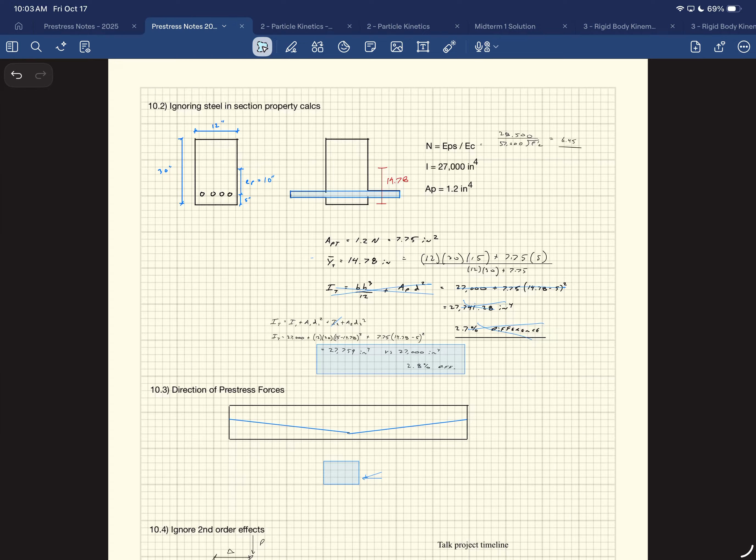Off this week, which is nice. Yeah, that's why I got the donuts. You had time, okay.

Just have a couple, there's a couple little topics left. We're gonna finish this topic. You have one more homework for this.

Okay, we're talking here about composite slabs, how you calculate it, and where the key components are at.

I should give you a minute. I don't think we have a full 50 minutes of class stuff to cover today, so we'll just take some time. That's what Tim said. He said that, yeah, and then we were there, and then 15 minutes and not finish.

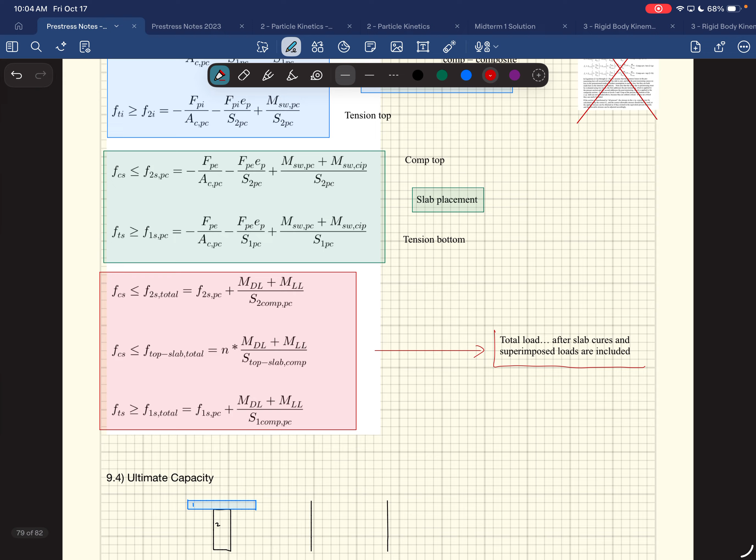It's hard to take notes while you're eating a donut. But on the name thing for Tim's class, apparently on Wednesday he clicked through 29 times to find my name specifically because I wasn't there. Did you really do it? Yeah. Nice. And then it came up today, naturally. Oh, it did. Did he add a component to it? If it's his name, it just clears. That's kind of fun. I thought he said that was only if he was... I don't think so, I think it's just if his name comes up with theirs.

Okay, and then we talked timeline. Did your captains tell you that we're just going to try to have... Sean hates this idea, by the way. Sean is upset, what does Sean want to do? I think we should just get it poured before the end of the semester.

But then when are we going to break it? Yeah, then we'd be breaking it during winter break. That sounds like fun, like Sean's gonna be here during Christmas. Yeah, during Christmas. I told Sean we should vote because it would be fair to everyone.

Which is fair, but the idea was by the end of the semester you have your designs all ready to go, and then we send it to them, and then we'll probably cast either the end of Christmas break or the first week of next semester, which is kind of weird because you're out of this class. But I'm gonna have to fail all of you beforehand.

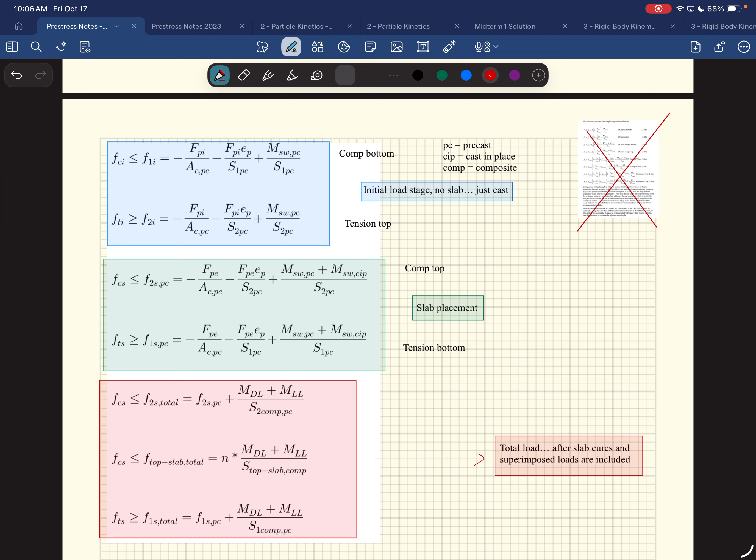But you can come back, you'll be in town, right? So you can come back and watch the break and stuff like that. But I think that's how we have to do it.

In the future, if we were to do this, I like the idea of being part of this class two years from now. I don't know if we could do it in this semester, it'd be really hard. Even if from the get-go we knew we were going to do it, how are you supposed to design something when we just finished shear design last week? You know what I'm saying? It would be hard to do.

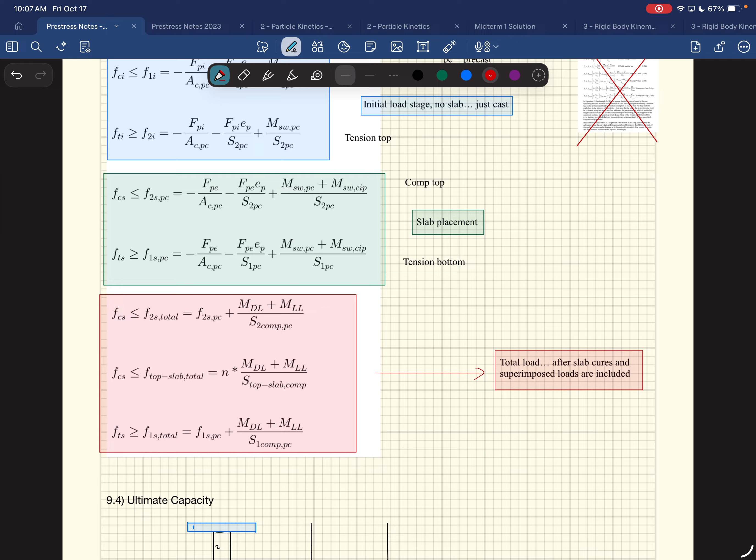So it would have to be this two-semester thing. Or use the WashDOT, or just use a program to blindly decide. Well, you could blindly design it and then prove it after you've learned it. Right, I can see that.

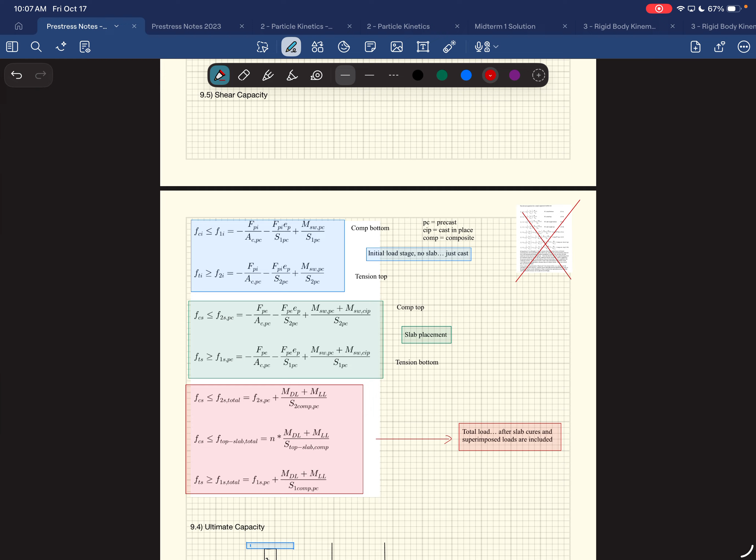Okay, so everybody finished eating their donuts because you got to eat another one. Any more classes today, Mike? I don't, I'm done. What about practice? Oh yeah, we just lifted today. You can't give it to them.

You know where you could really pawn off donuts is Tate Lab, if there's people in there. It used to be the hangout spot. I don't think it is much anymore. Yeah, 'cause everybody's got their own laptops.

Friday after, throw them in EMLC. Oh, you can do EMLC, just throw them in there. You could sell them in the EMLC. Sell them, give them a dollar a piece. I'm in there, yeah, you can make some money on it.

Only for the students, not the employees though. Kyle, it's two dollars for that. Two dollars for you. I don't work today, okay.

All right, everybody, we're good to go. All right, so let's go to this, let's finish up our notes, just kind of show up for this. Your hands are sticky.

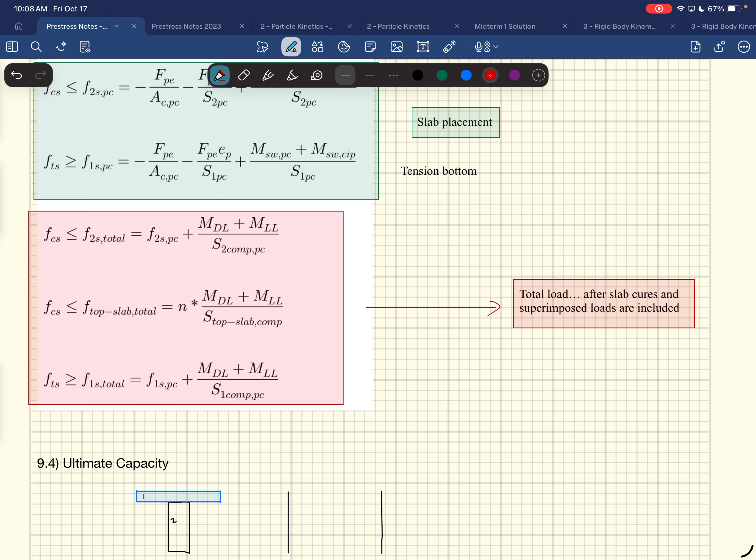Okay, so we're on this topic right here. This is the different load stages that we use to control these designs. What do you use? Just the self weight? Do you use the dead loads and the live loads? What are we doing here?

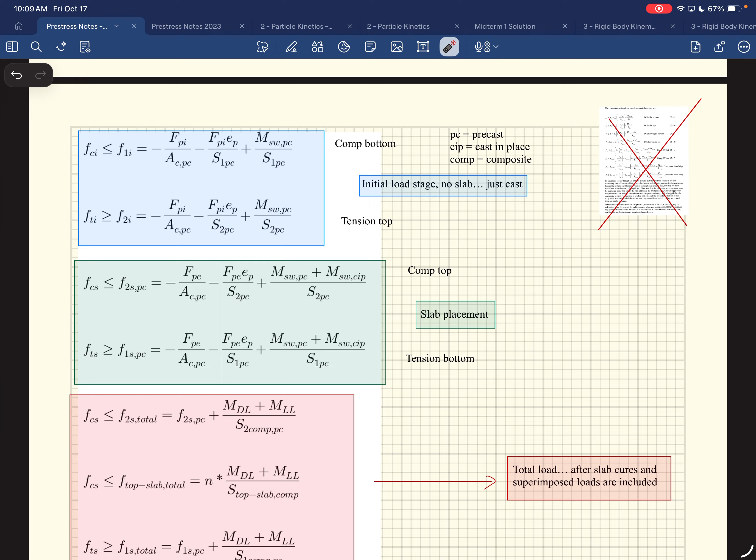So this is the first load stage up here, okay, and this is just the initial load stage. This is exactly what we've done up to this point, because the beam doesn't know it's going to have a slab on top of it at this point. So you're just making sure the initial load stage is okay. That's going to be tension at the top and compression down at the bottom, okay? Everything is the same there.

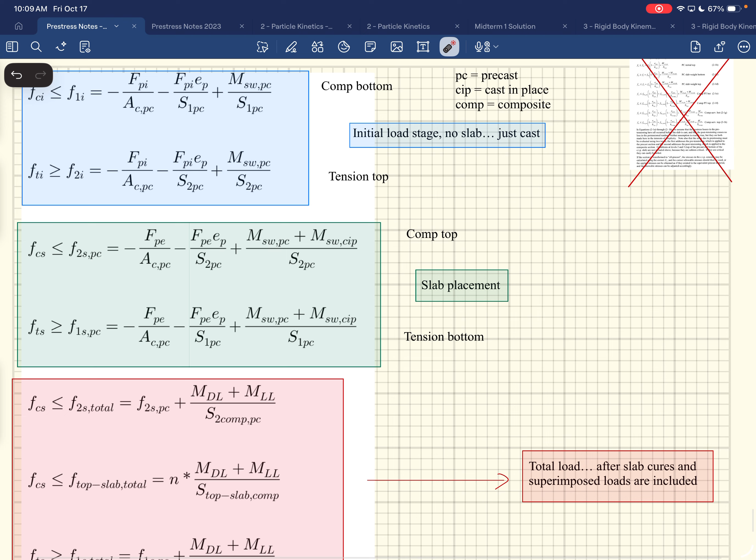Then we come over and we do the slab placement. In the slab placement, again, it's the same equations. It's only the pre-stressed beam that's carrying anything, so we're still just using the pre-stressed beam properties. What we care about in this situation is the self-weight of the precast member and the self-weight of the cast in place, because it has to carry the new fresh wet concrete that's on there at this point. It hasn't become composite. What we care about in this load stage is compression at the top and tension down at the bottom of the pre-stressed member. There's nothing going on in the slab at this point.

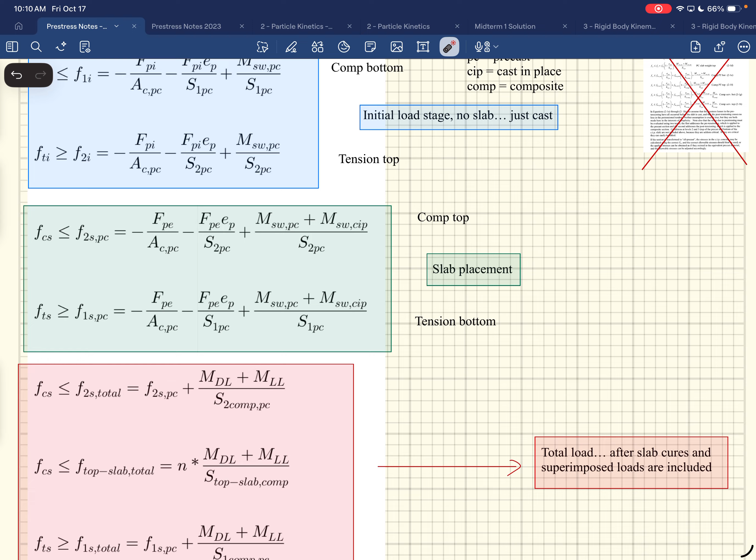From here on out, those stresses are locked in place. The pre-stressed beam is carrying itself and the self-weight of the slab, and those are locked in place. From here on out, it's going to be a composite section, and we're going to add on to it the composite stresses that are happening. So now the slab is acting compositely with the precast member, and that's what this last one is.

So to calculate those stresses, this is one of the places where I tried to simplify from what Stanton's did above there. Stanton's above used this entire equation and put it right here. We could just know that it's going to be these stresses.

God damn it. Oh my God. These stresses right here, right? Those are locked in, so it's going to be those stresses.

Oh sorry, not there, this guy to here. It's going to be the stresses that are locked in from carrying the self-weight of itself and the cast in place, and then add on to it, just superimposed on top of it, the superimposed dead load and the live load. But now, instead of dividing by the S2 of just the precast member, we divide by S2 of the composite member, because that's going to change. Because this neutral axis moves, and so the S2 for the composite member is going to be slightly different.

So you're just going to use that same value. You do this in a homework, by the way. Make sure we get this all F2S. Right, that's going to go, use this.

Fucker. God damn it, I'm trying to use the new tools and I just...

There we go. Clear as day.

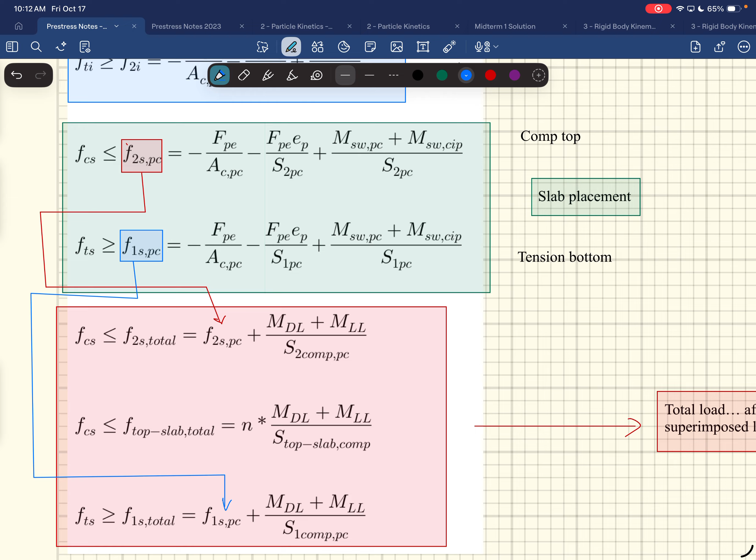Okay, and then, so there's actually 3 places that we have to check, right? So this is just my pre-stressed member. This right here is compression, top of precast member, because that's just the precast member.

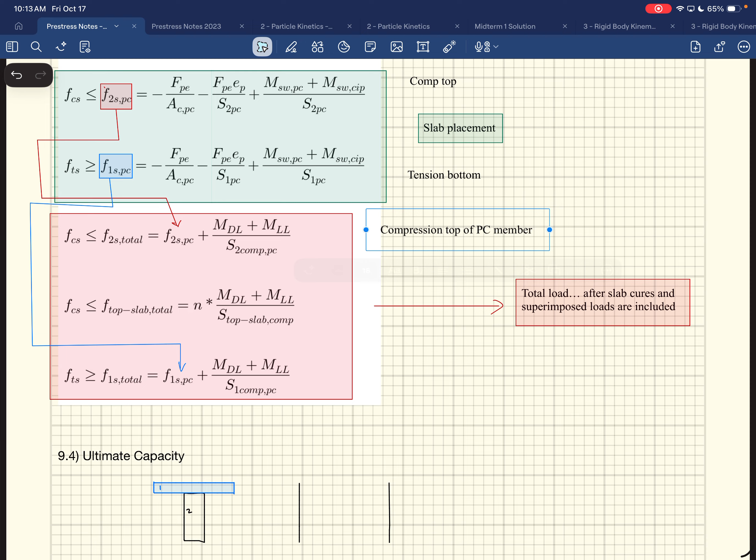Down here is going to be tension, bottom. Is what that one is down there.

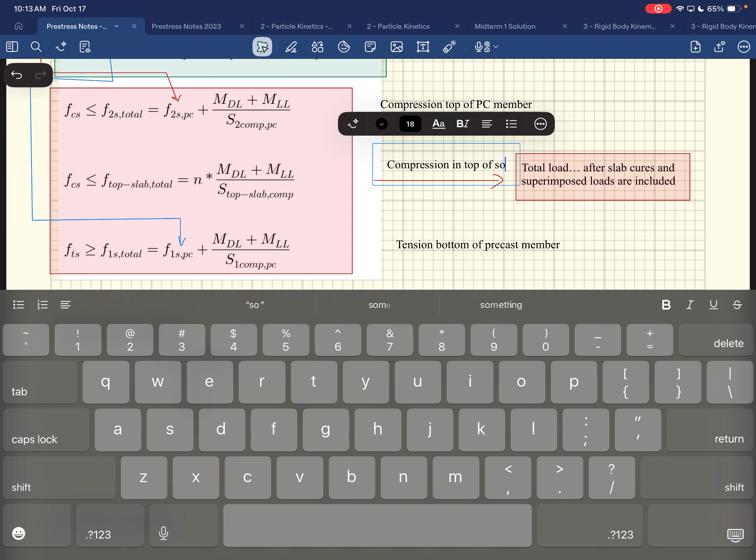And then the one in the middle here, we haven't talked about yet, but this is compression in top of slab. Not the top of the precast member.

What's that? Or, yep, I already got it. Why did I call it precast member?

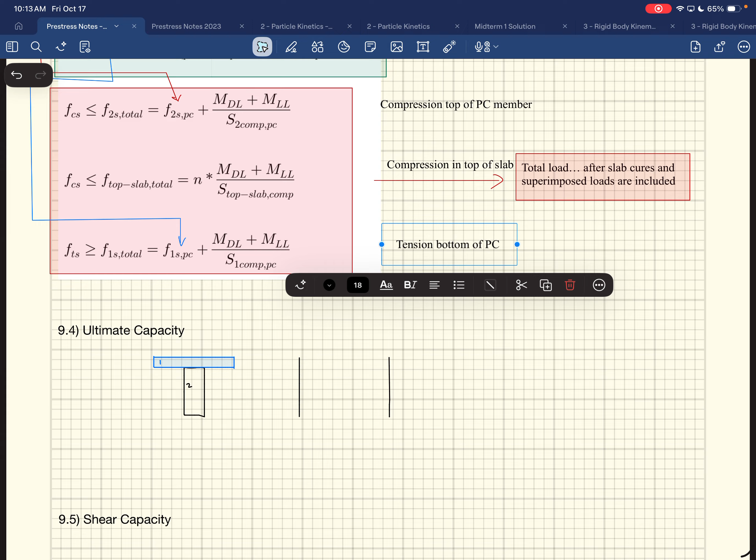And this one I'm going to go call PC. So we already got the top of the precast member, but then we also have top of the slab we have to check, right? Because it has limits too.

Okay, and you notice that this one, what's happening in the slab is just the superimposed dead load plus the superimposed live load divided by the S for the top of the slab, and then we have to modify it by that N, because remember that N has to do, we pretended it was something else so we could do MY over I, and now we got to bring it back to the actual stresses.

And so we multiply it by that to take it back out to the actual stresses, or actually in this case, bring it back to the actual stresses because it'll be less than what you calculate there. Because N in our case, for this case, when we have the precast or the post or the cast in place on top is the weaker stuff. We're doing the weaker is what we're transforming.

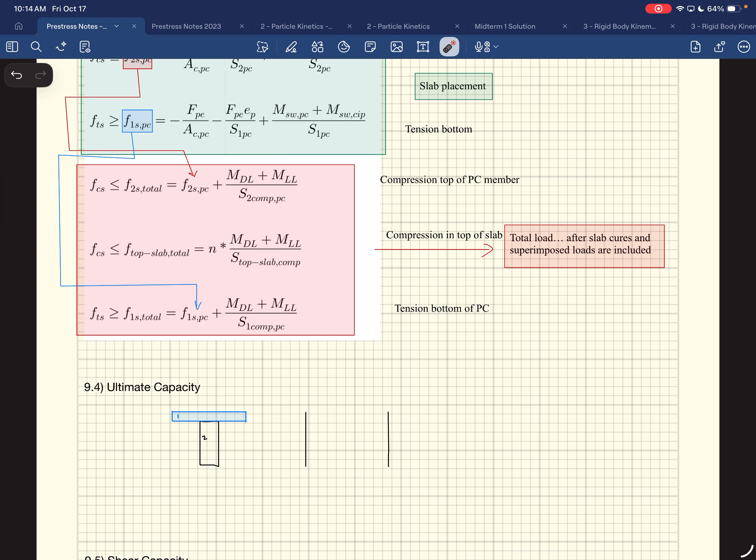So, okay, so let's talk about some of these variables to answer Will's question, just to clear that up. Right? If we've got a rectangle like that, and then we've got underneath it our web.

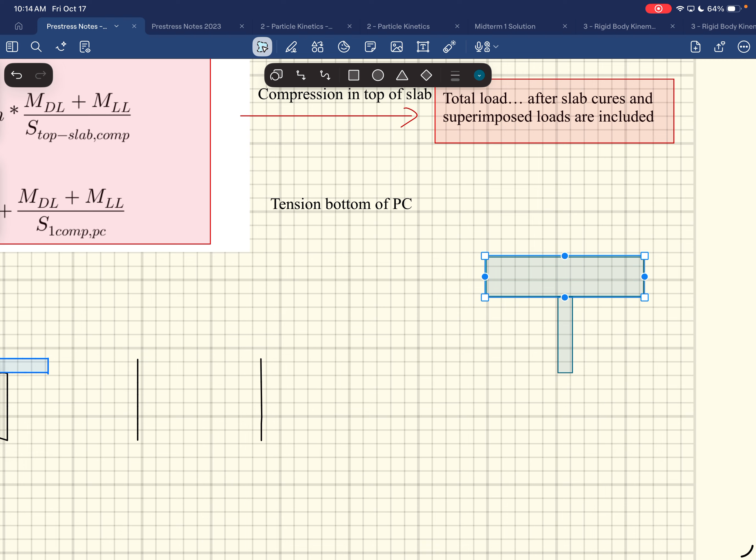Yeah, that's, I don't like it. Oh, God damn it. Okay, fuck. I barely know how to use this thing as it is, and then when they change things.

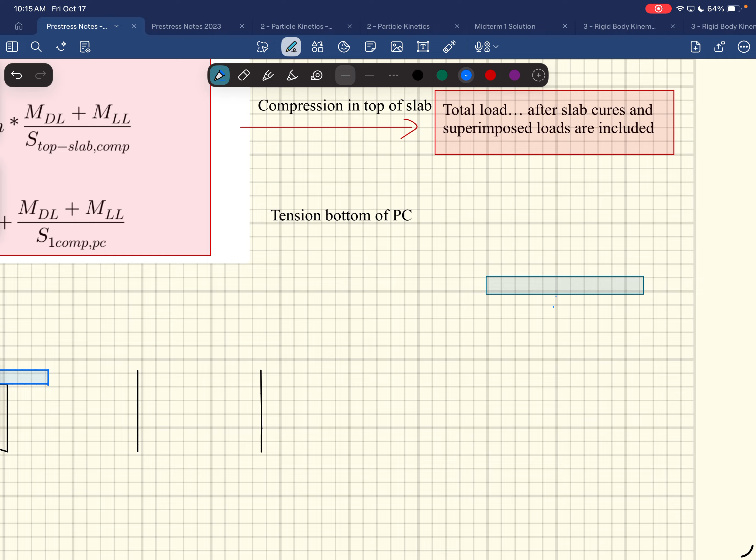Okay, so there's my precast member down at the bottom. So your first thing you're going to have to do is calculate where the CGC is of this.

Right? The CGC is going to move, right? It's going to move up. I mean, this is exaggerated because yours is going to be like a really big precast member and then like a small slab on top, so it won't be as exaggerated.

But this, say you just had something like this. You have the precast down at the bottom, and then you got the cast-in-place slab at the top. You have to find the new CGC, and that's just a weighted average, just like you do the center of gravity of anything, do the weighted average.

Start at a reference point, do the area of this multiplied by where its centroid's at, plus the area of this multiplied by where its centroid's at, and then divide by the total area, and then it'll tell you where the CGC is. So you're going to calculate the new CGC. It won't line up with the other CGC, okay?

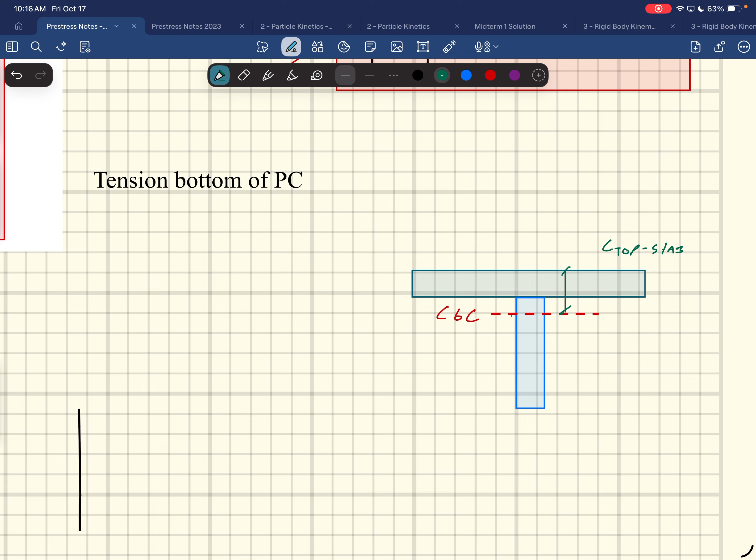Okay, then we have another one that's going to make a difference, or what we need to know, right? Is what this C is, because this is taking me to the top of the precast member.

So C top, or I guess we call it 2. I don't like to call it 2, but in my numbers over there, I call it C2. And we'll put a T on it because it's the C2 of the transformed section. You could write transformed if you want.

Because it's going to be a different C2, since you'll have a C2 of just a precast member alone, that's the distance from its CGC up to the top. But in this case, this is the transform, so you're going to have a new one there. And then you'll have one going down too, this dimension matters too. When calculating the tension at the bottom, we'll call that C1 transformed.

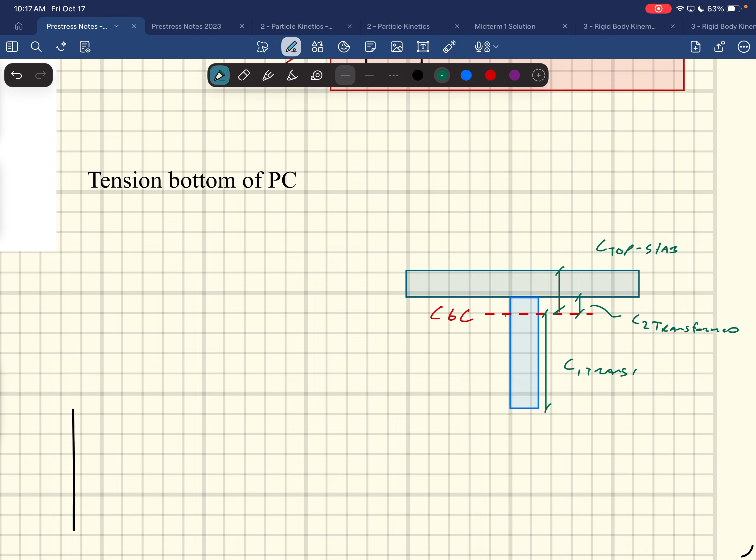Okay, so in terms of the variables over on the side, this is going to be S2 composite member PC, which is just going to be I transformed, we'll call that IT, over C2T.

Okay, and then do the next variable, which would be S1 composite PC in the precast member. It would be I transformed over C1 transformed.

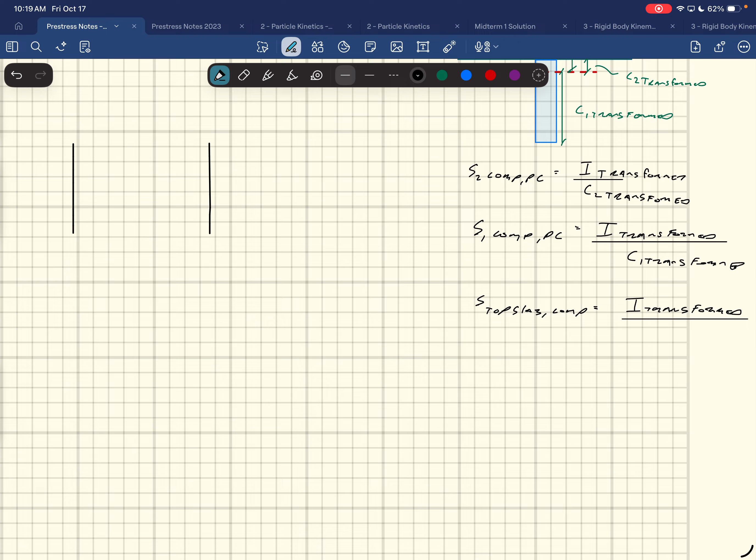Okay, and then the last one is the S top slab for the composite member, which is going to be I transformed. I regret spelling out transformed, I really regret it, I should have just said T. T means transformed, but I tried to be as clear as possible, and I got tired of writing it. This would be C top slab, what did I call it up there? C top slab.

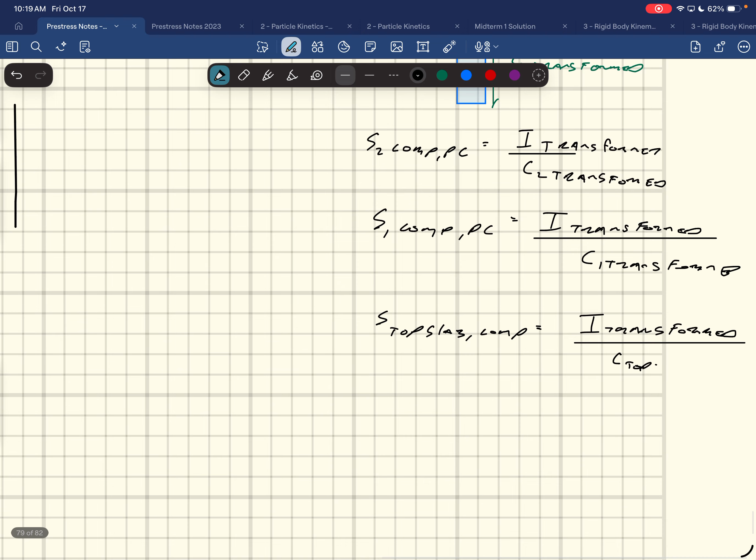Okay, so those are the variables that you would use over there. Does that make sense to everybody?

And the reason we care about that is this top part's going to be in compression, so I care about what the compression limits are in my precast member, because you can't go above 0.6 F prime C, so I need to compare that to the 0.6 F prime C. Also, up here at the top, my top of my slab is also going to be compression. I need to make sure that's less than 60% of my F prime C as well, and it has a different, lower F prime C, so you have to check that.

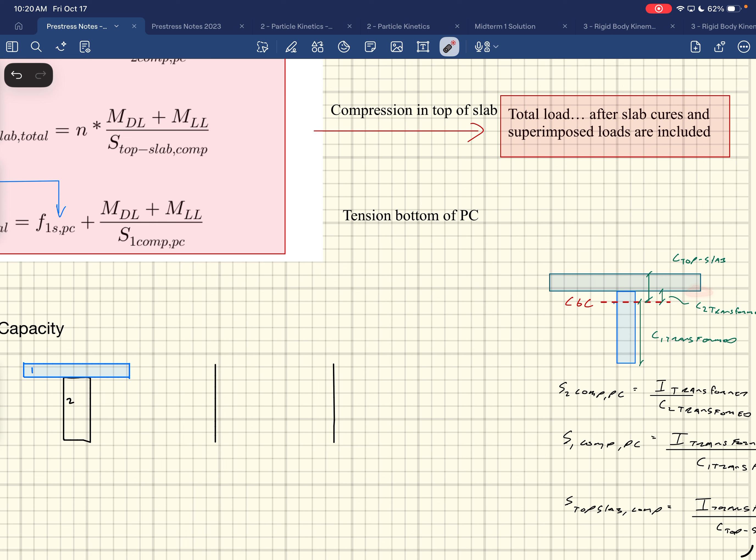I don't need to check the bottom of the slab, because that's going to have less compression than the top of the slab, so I just go straight to there. So where you check stress is the bottom, the top, and the top of the slab. Those three places are what we check.

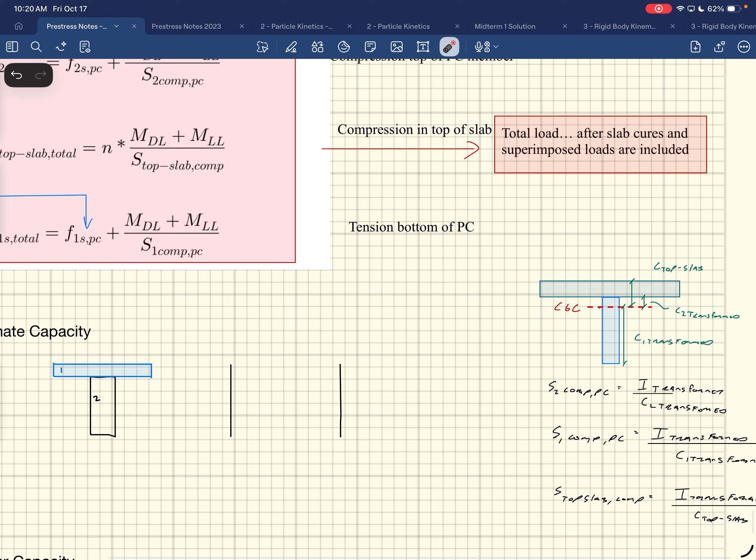And like I said, if you follow this, it's pretty straightforward. You could do this in Excel, and you have to do this along the entire length as well, so this is the same kind of plots you used before. You do that with these if you wanted to figure out if it's okay along the entire length. Okay, cool, so that's that.

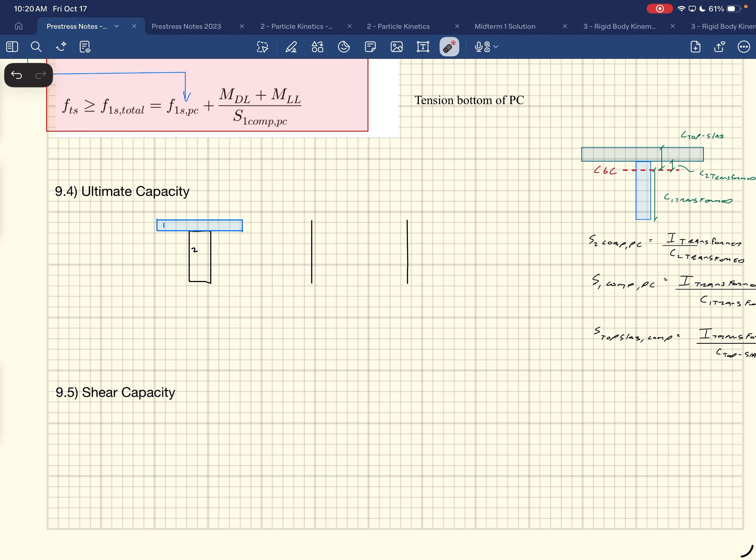That's the composite sections, this is the elastic analysis, just the initial pre-stressing stuff. You also still, in a composite section, have to check the ultimate capacity as well. You have to check the full moment capacity, and to do that, this is the easiest way to talk about it. And then it talks about it briefly in the code and just says, use mechanics and figure it out.

And so what happens with this is interesting, like in the reinforced concrete code, it tells you the rules. It says use the Whitney stress block for compression, assume elastic perfectly plastic steel, do this, but it never gives you an equation. It just lays out the basics behind the mechanics, and then you have to calculate it. And they do that same thing here, they just say keep with those same mechanics.

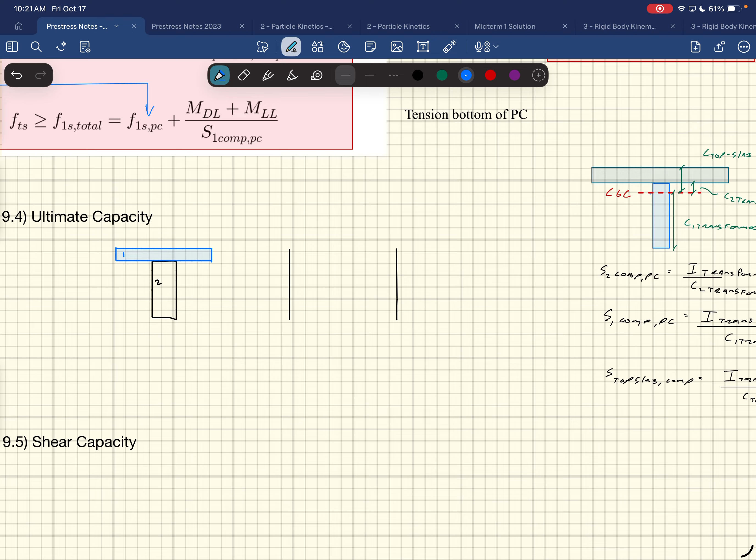And all that changes really is when you go to the Whitney stress block, you just end up with two compression areas, you have a compression area up here for the...

You son of a bitch. Is that funny, Neil? Is that funny, yo? It is kind of funny, isn't it? Like, why the hell? Yeah.

Nailed it, first try. And then there'd be another part that if it's going down into the web, and it has a different strength concrete.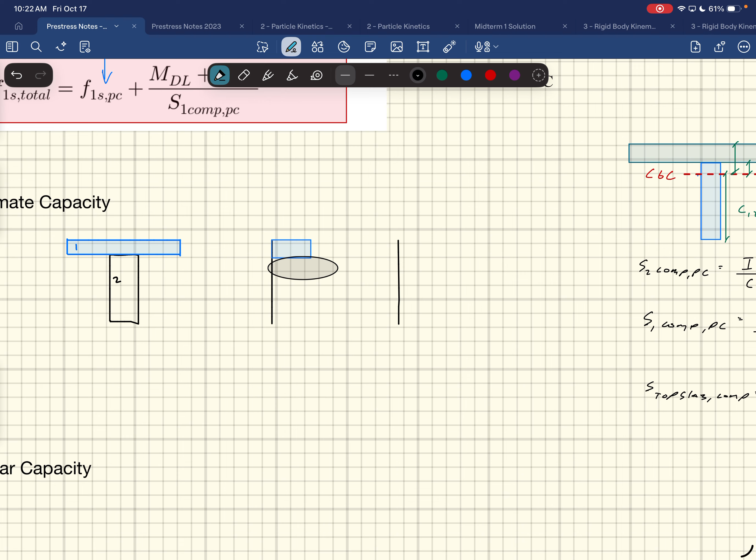It started out a block. Yeah. Nailed it, first try. Okay.

I think the sound effects are what... hey, that's right. You gotta make that if you want it to work.

Okay, you'd still have this FPS down below, but then you would have, this is 0.85 F prime C of 2, right, for the whatever the second one's made out of, and this one up here would be 0.85 F prime C 1. Right? So if that makes sense, right?

You just, if the top, and this is still A, this is still A. Right, that's still my distance A, right? We still don't know what that neutral axis is, so you start out with that. And just because it's two different strengths of concrete, that's why there's two blocks, because there's two different strengths of concrete, right?

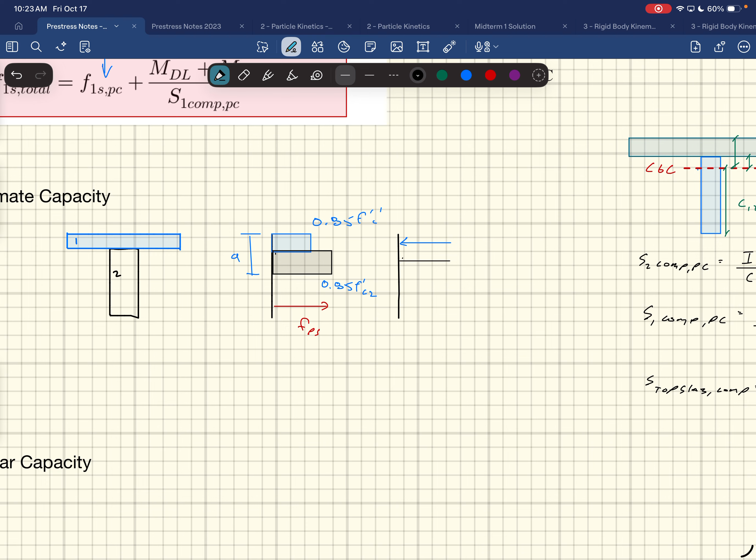And so then over here, when you look at forces, my forces will be, you'd have one that's coming in at the centroid of this one, that's up in the flange. You then also have another C coming in here. You'd have a C1 and a C2, and then you'd have a T down here.

T is equal to FPS times APS, right? And you do the same thing. You just start out with this, and then you say sum of my forces are equal to 0, and that'll tell me what my neutral axis location is, and then I sum my moments about one of the points, and I get my total moment carrying capacity.

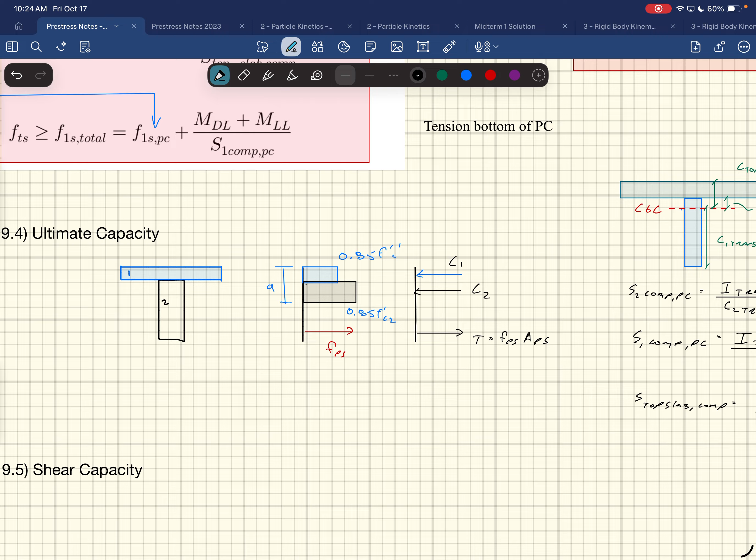So that's what's also pretty sweet, right? It's weird that the code just lays out the mechanics, and then you have to figure out what the equations are they're using. One thing that's sweet about it is you just apply those mechanics to all different shapes. We didn't change anything, we just used the same mechanics they laid out. If you had a triangle, it's the same mechanics you use, so you kind of derive the equation as you go along. You have to be smarter to do this than you do for steel.

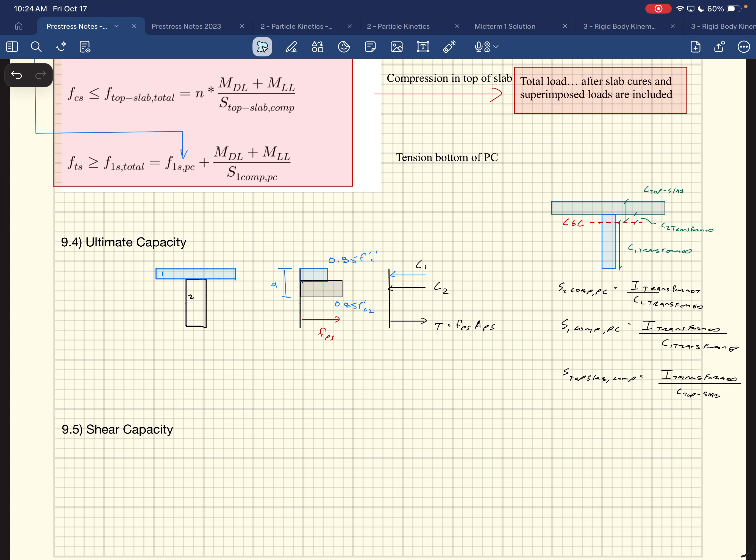To be part of the hood. To be part of the hood. You guys are in steel right now, right? It is kind of nice though, isn't it? Or just like predictable.

No? It's too hard though? See the last homework was. Yeah, it's fine until you start designing shit out of the appendix. Especially where the homework is on something where they spent 30 minutes talking about the homework, and then instead you were proctoring an exam for me.

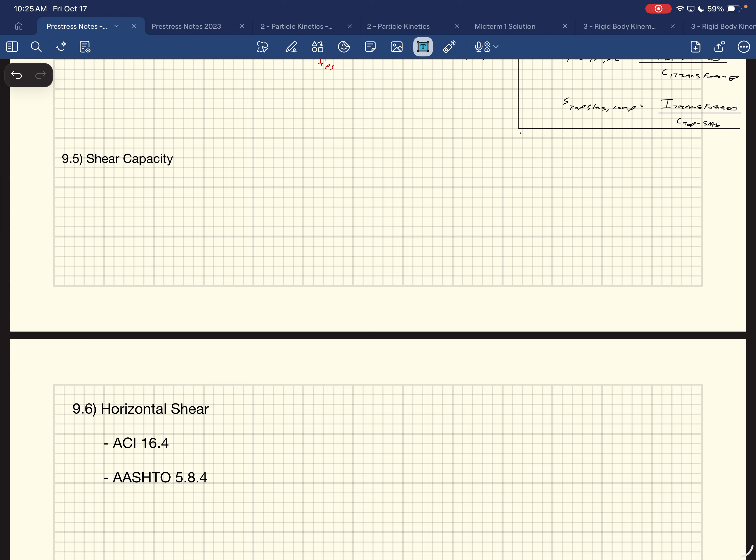No, that's really funny that he said he was going to record it, and then he just didn't record it. I feel like he never had an intention of recording. It was just tricking you. He was tricking you guys. Yeah, I'll record it for help, and he was like, talking to him, he's like, well, the notes weren't giving you anything until I was like, I wasn't there. And he's like, oh, that's right.

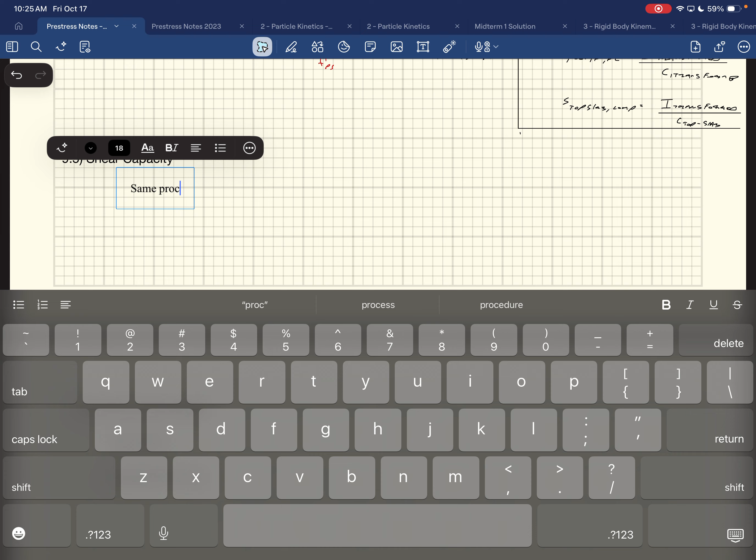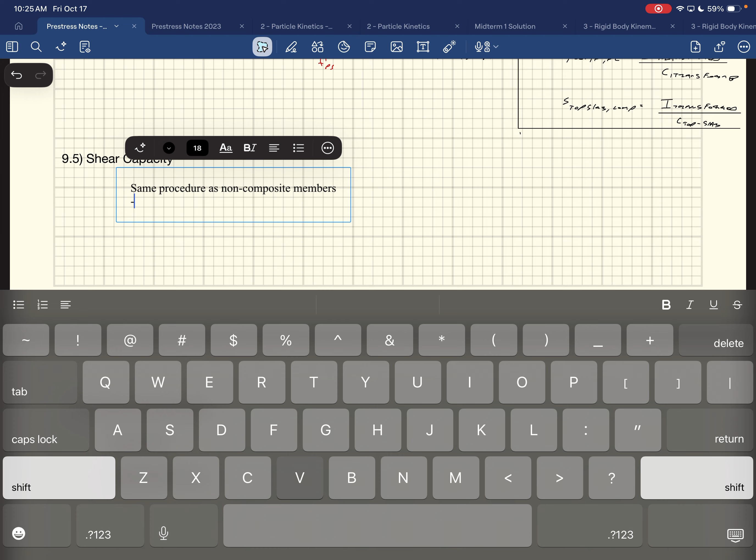All right, all we're going to say about the shear design is the same procedure as non-composite. Which was fun, right? You had fun doing that, right? The Vci and Mcr equations change slightly.

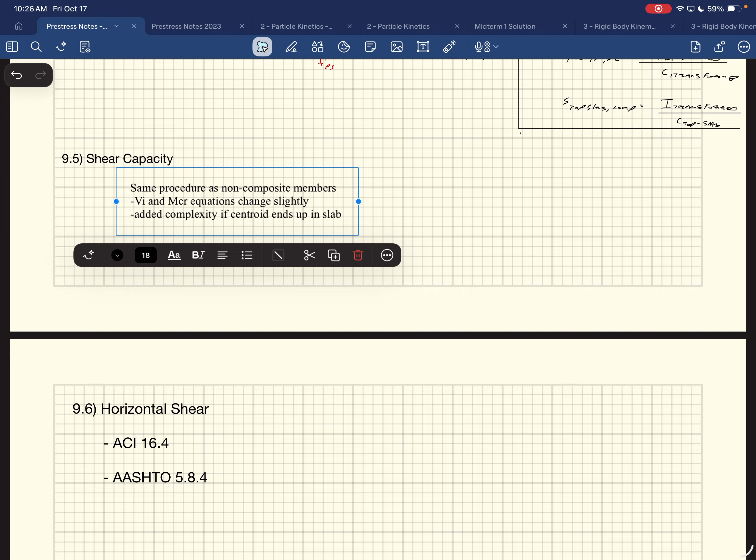And then the last comment here: added complexity if centroid ends up in slab. There was one of the variables you used that had some language in there that talked about if your centroid was in the flange or in the slab up above, then you have to end up using the border between the two as opposed to the centroid. So it just gets a little bit complicated, but other than that, it's the same.

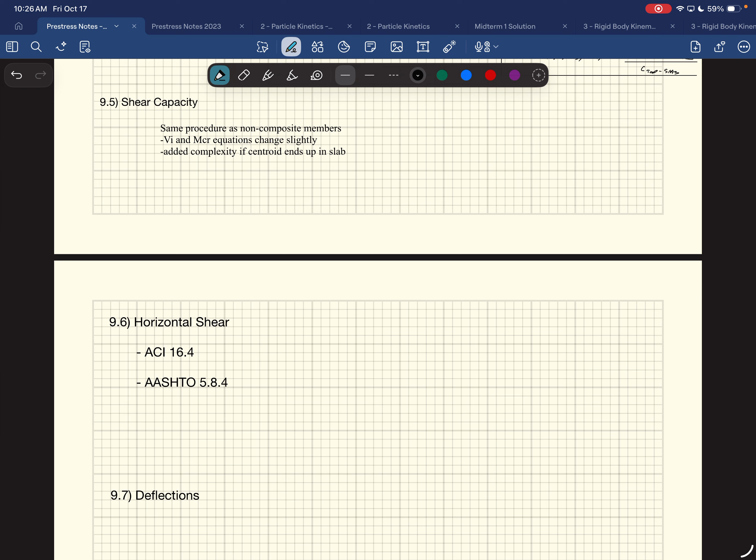Right? Horizontal shear, we talked about horizontal shear before. And that's just, right, if you got members that are going, you got this guy going like this, underneath it like that, right, you have to tie them together, right?

And there's a section of code that discusses that, right? It's ACI 16.4, talks about horizontal shear transfer and basically what that rebar on top, like what spacing it needs to be and how much it sticks out and if it needs to be hooked and stuff like that. That's all covered in 16.4, or in AASHTO it's 5.8.4. We're not going to do it, but just keep in mind if you end up doing that, you have to include that.

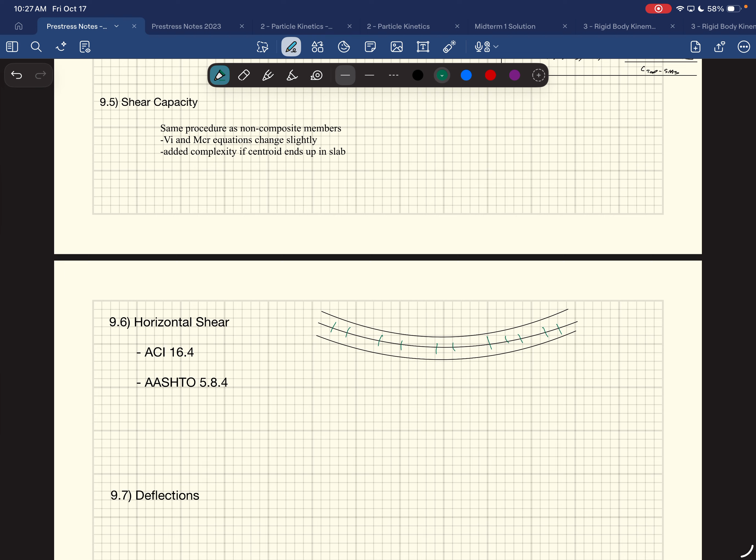Okay, deflections. I think we're going to use transformed section properties for deflections after slab cures, I guess. After slab placement, I guess.

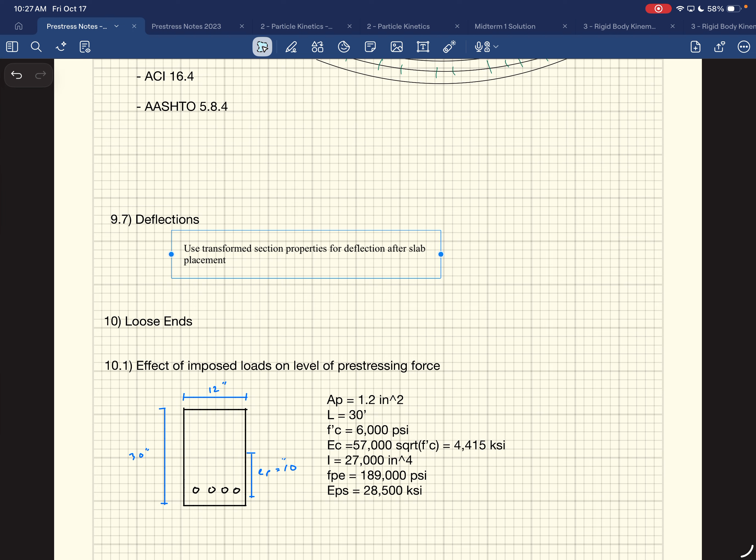Right, before slab placement, deflections are locked into the beam. So you basically just do deflections of just the pre-stressed beam itself, right?

And then under its own weight, it's going to deflect down a little bit. You cast the slab on top of it, it's going to deflect a little more, right? And that's the starting point, a known deflection. Then you put the slab on top, it cures, they act together, and now all the superimposed dead load and live load that come afterwards use the transformed section properties.

So you'll have to pre-calculate the sag that comes from just the pre-stressed member and the self-weight, and then add on to it the transformed section property deflections. The total deflection is them added together, right?

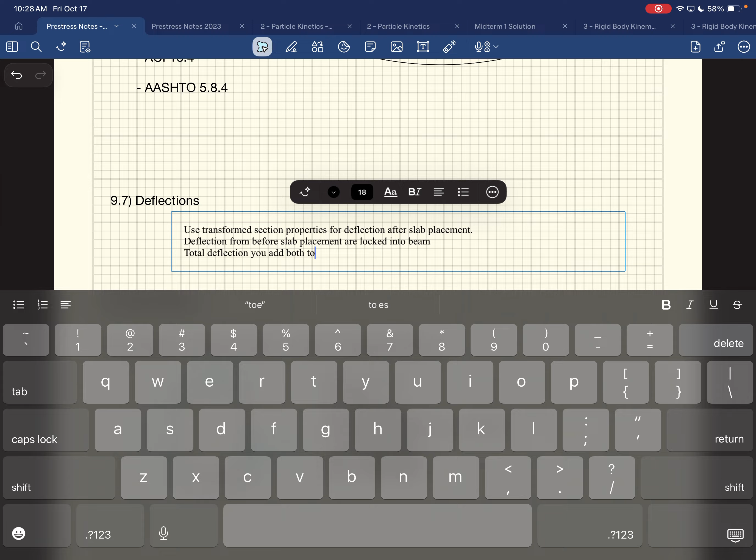All right, so that's it for the composite members. You have a homework - I don't think you calculate deflection, I think you're just checking to make sure that it works. And I said before you have plots, and I can't remember if I have you do the plots or not for the precast. It might just be calculating at one point on the worst case scenario.

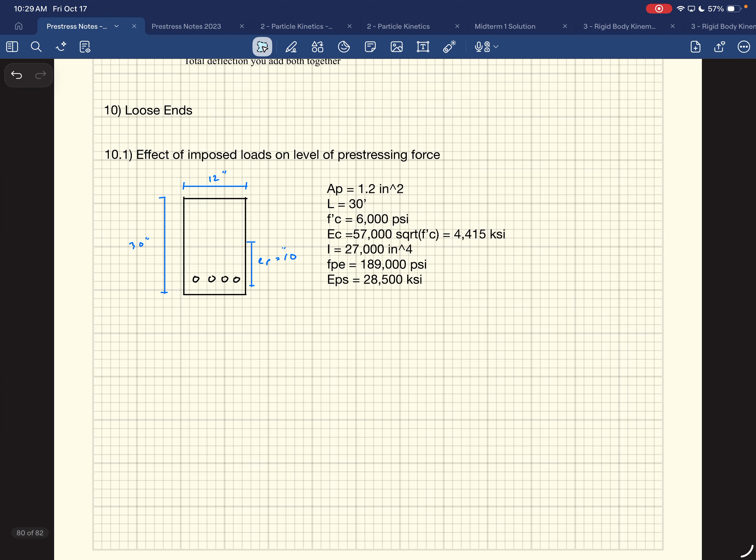Okay, so some loose ends, some things we made assumptions about at the beginning. We're just going to show you that it was okay to make those assumptions. There's this one - afterwards, when I've taught this class in the past, I needed a little bit more to talk about, and I thought this would be a good thing to cover, these loose ends.

So one of the things that maybe didn't sit right with you, or maybe you were totally okay with it, was that when you have a beam that's pre-stressed and you apply a load to it, it's going to stretch the bottom out a little bit more, which means the steel stress is going to go up, right? But we ignore that - we ignore the fact that the steel stress goes up. Is that an okay assumption?

I'm going to show you with a simple calc here that it is probably okay to make that assumption. It will be. So this is just a beam, right? It's a pre-stressed beam.

It's 30 inches by 12 inches, and then it has a distance down, an EP down to the pre-stressing of 10 inches, right? So it just goes down there, and that's where my pre-stressing steel is at, okay? It has these properties - my area of pre-stressing steel is 1.2 inches squared.

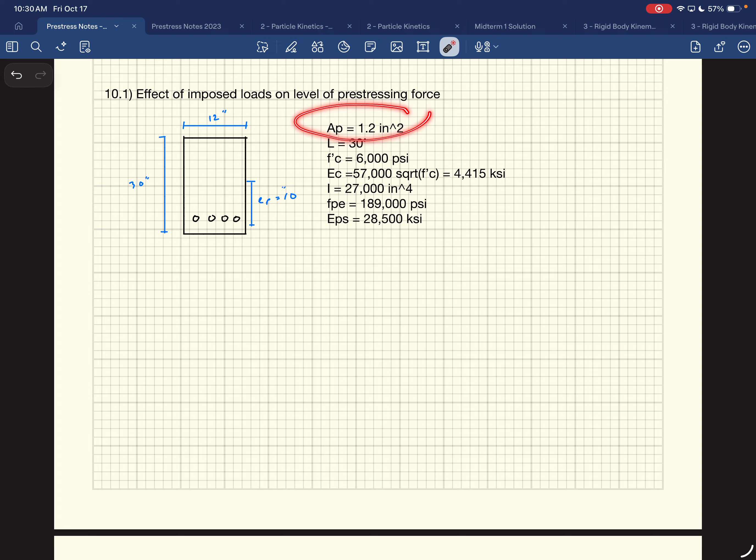It has a span of 30 feet. F prime C is 6,000 PSI. Here's my EC, 57,000 square root of F prime C. Here's my I for this section. My FPE, we've stressed it to 189,000, and EPS is 28,500.

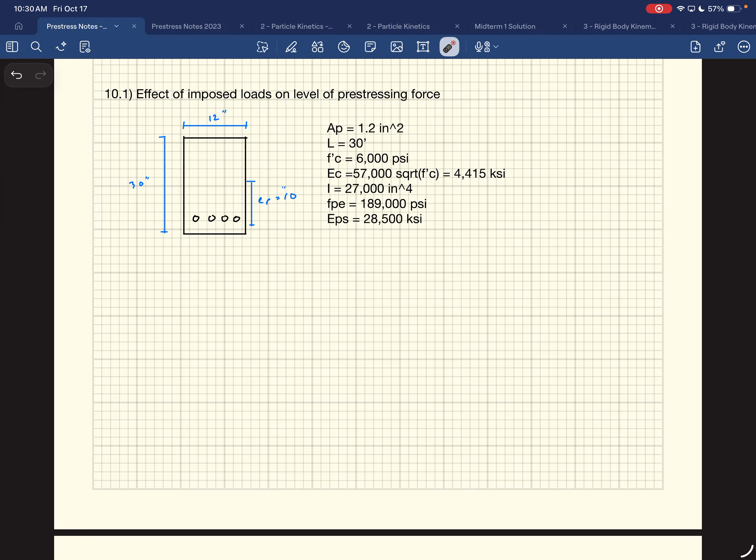Okay, so what we're going to do is just look at the self-weight. If I take the self-weight of this member - it's not super light, 30 inches deep by 12 inches wide, so this is a hefty beam - we'll just look under self-weight and see what the self-weight alone does to the pre-stressing, okay? It's kind of a journey to get there, but let's do this.

So first I'm going to figure out what the moment from the self-weight is. M self-weight is just going to be WL squared all over 8, right? And in this case, it's going to be 375 pounds per linear foot, which comes from the density of concrete. There's my 30 feet squared divided by 8 - it's the moment at the center of a simply supported beam.

This ends up being 42.19 kip-feet, which is equal to 506.25 kip-inches. Okay, all right.

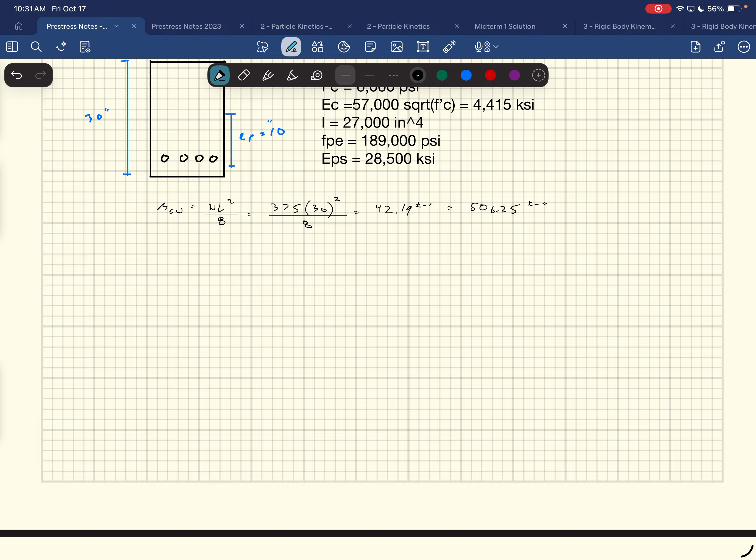So we got that. Now, given that moment, I can calculate the stress in the concrete. I really want the stress in the steel, but I have to go through concrete first. So the stress in the concrete is just going to be M - we'll call it F conc.

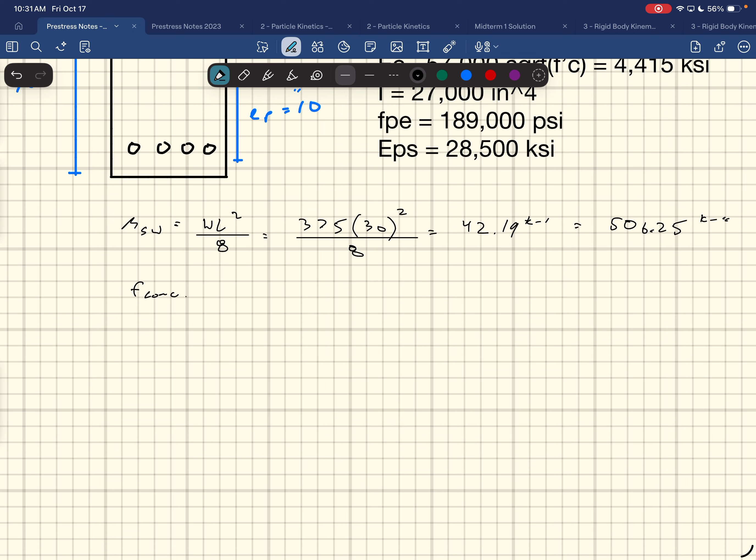F concrete at the pre-stressing, that's just going to be MY over I. Because this is under elastic conditions, we're not going to ultimate, so under elastic conditions we can just do MY over I.

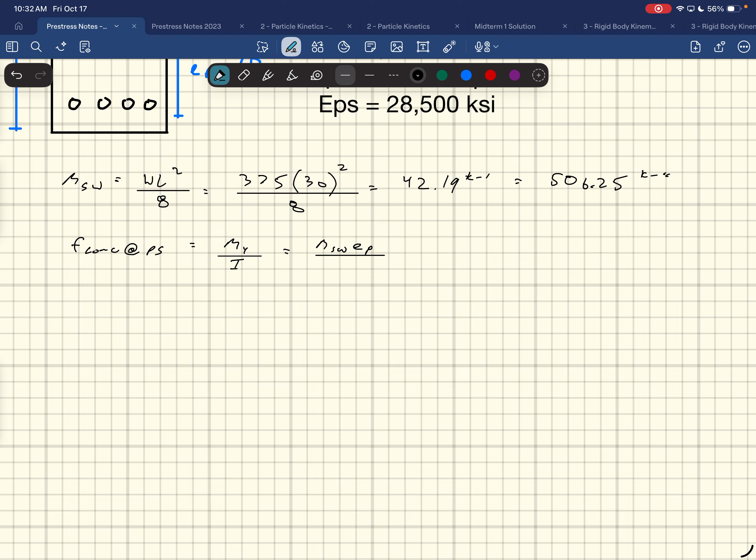This is going to be M self-weight, which we just calculated. The Y in this case is going to be EP, because I'm trying to find the stresses at where the pre-stressing is at, and where the pre-stressing is at EP. This is the CGC, and you go down, EP is what the Y is in that equation. So M self-weight, EP, and then that divided by I.

So what we get here is 0.188 KSI. So applying the self-weight changes the concrete stress by 0.188 KSI. Barely changes the concrete stress. But what does it do to the steel stress?

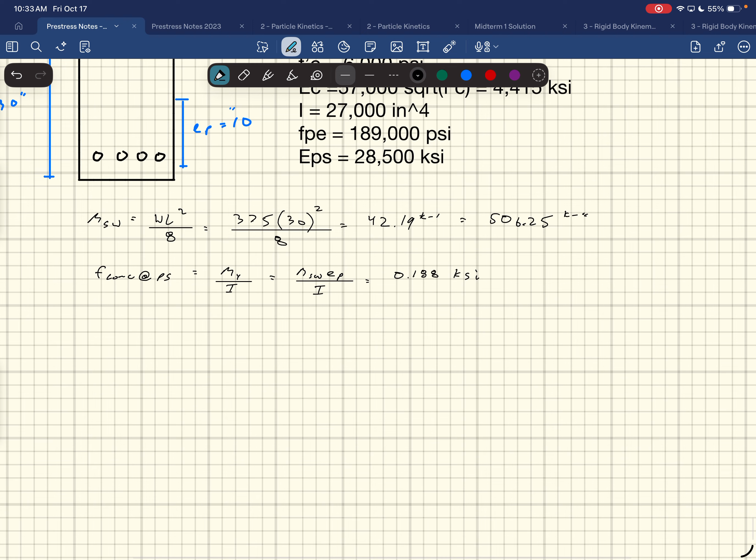This is the journey. What we're going to look at is what strain. Let me take a step back. It's all based off of this. It's got stresses that look like this, and I'm calculating what the stresses are right here. This is my F.

My FC. So when you do MY over I with this stuff, you're actually figuring out what's happening in the concrete. So what I just calculated right here was this change. How much did the concrete change? But the concrete stress change is not the same as what the steel changes. They're locked in together, but they don't move the same—or sorry, they're locked in and they move the same, but they have different stresses.

The steel's going to have a different stress. It's a lot stiffer, so the change in strain will give us a bigger change in stress. So at this point I need to calculate how much did the concrete move. If I know that the stress of the concrete is 0.188 KSI, how much did it move? I do that just by dividing that number by the elastic modulus, and it'll tell me the strain in the concrete.

So then I do that. Strain in concrete at post-tensioning or pre-stressing is just going to be the F concrete at PS divided by EC, E of the concrete. And if you carry that out, in this case you'll get 4.258 times 10 to the negative fifth. It does not move very much in terms of strain.

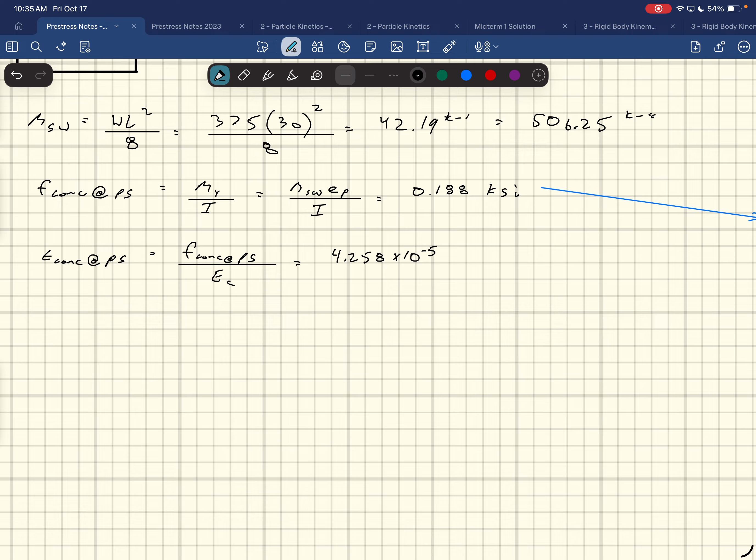But now I could say, well, the steel, since it's right there at the same location, moves the same. So now if I try to figure out how much did the stress change, I take E of the pre-stressing and multiply it by that strain. So my change in pre-stressing, delta FPS, would be the strain in the concrete at PS times the elastic modulus of the pre-stressing.

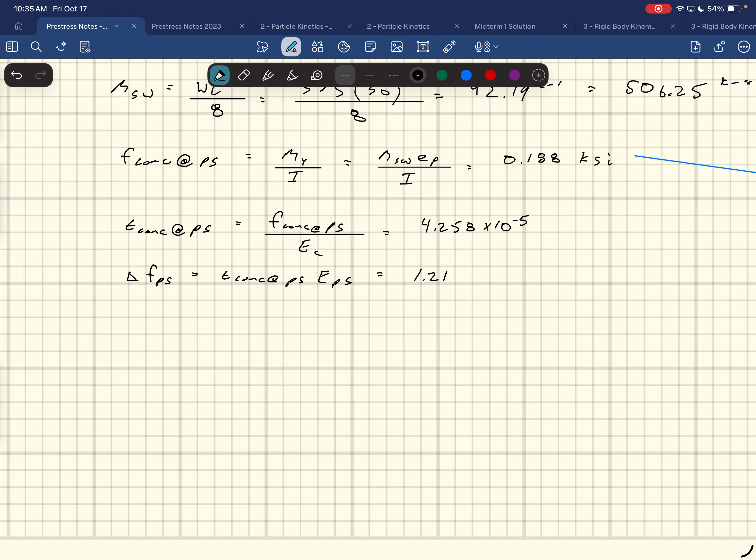And if we do that, we get 1.214 KSI. So is that a big change, 1.214 KSI? No. What did we start out with? 189,000 — we started out at 189,000 PSI.

This is better—instead of comparing PSI to KSI, I'll make both KSI. So even then, 189 versus less than 1% change. Did I do it right? It was a weird comparison, I know.

Okay, now, that's not a big difference—that's just from the self-weight. But you can imagine, you put the live load and other things on there, that number will go up. But the order of magnitude is going to be in the same vicinity, just for an example. So now I know all of you are uneasy about it—you didn't like it.

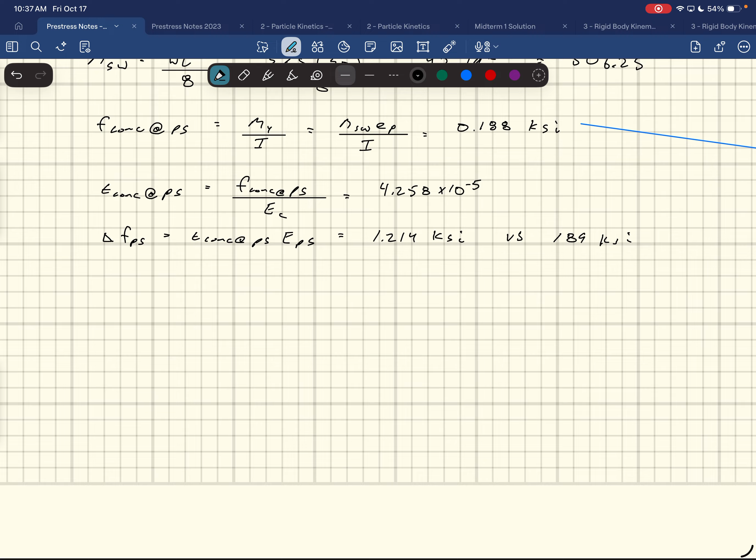There you go, it doesn't make that big of a difference, okay? A little fun journey, take on a journey here. Okay, so then you go over here.

Now another assumption that we made was that we ignore the effect that pre-stressing has on the section properties. This one you may not—you do this in regular concrete too. When you calculate the section properties, you ignore the steel as being part of it, when you're calculating deflections and stuff like that. Is that okay to do?

I mean, to do it the right way, what you should do—I already filled these things out. Lucky you guys, huh? Lucky you guys.

But if you're being a stickler, you should do transform sections on this. This would be, or this one we're transforming the stiffer material. So we've gone the other way this time, right? Yeah, look at that, so we've gone the other way. You could do either way. So is that okay? So based off of this, is this okay? So really what you would do is you would need to do transform section properties in order to do this.

So then you do the ratio between the pre-stressing steel and the concrete, right? You have to calculate that. Oh, I didn't fill out all the parts.

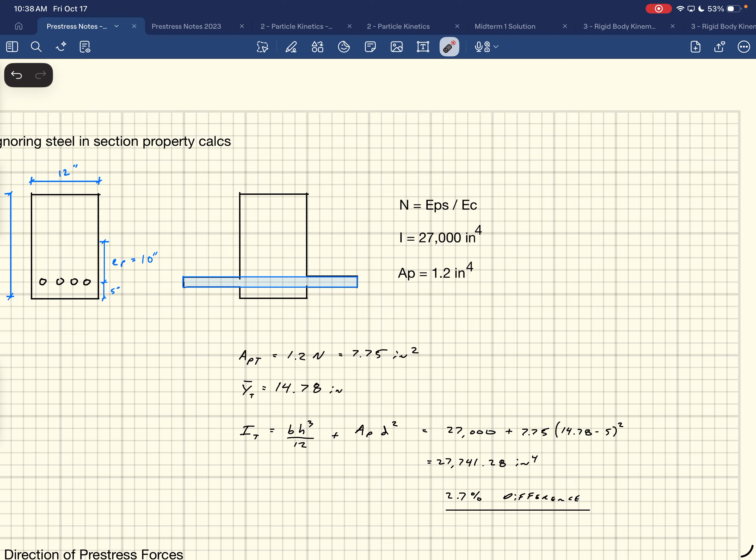This right here would be equal to, in this case, 28,500 divided by 57,000 times square root of f prime c. And if you take care of all your units, this ends up being 6.45. It's a big difference—that's a big n, right? Because now, instead of going between a weaker concrete and a stronger concrete, we're going steel and concrete, so there's a big difference. So a value of 6.45.

My I, just in general, what we would use in actual design, would be 27,000—that's I of just the rectangle, okay? And in this case my AP, this is the same section from above by the way, is 1.2 inches to the fourth, okay? So then you've got to transform—this is where it gets a little weird. You have to transform this steel.

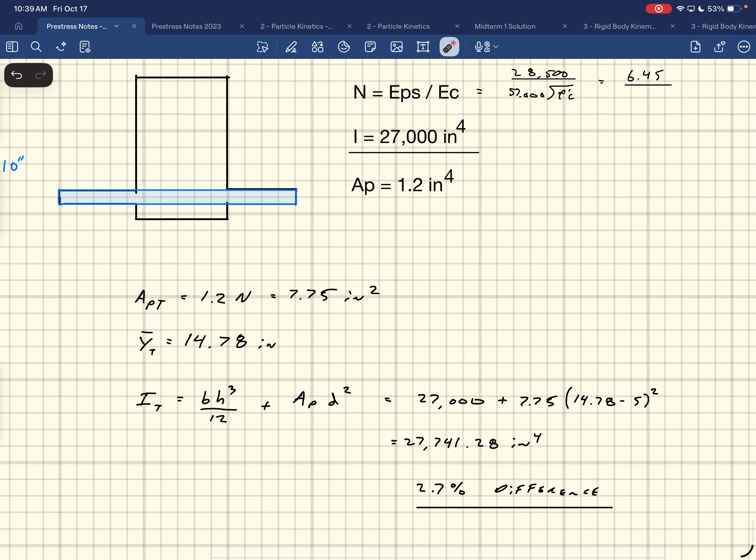Before, we had a known width, like we had the two different members, a known width, so we just changed the width of it. Here, we always just assume that steel is concentrated at one point, so it doesn't really make sense to change the width. So what you change is the effective area—instead of transforming the width, you could just transform the area of the steel.

So the area of the steel was originally 1.2. We multiply it by the 6.45, and so we treat it as if it has an area of 7.75 inches squared. Does that make sense? It's not like we have a known depth of the steel—we just say there's steel at that location. So you have to transform the area as opposed to transforming the width, okay?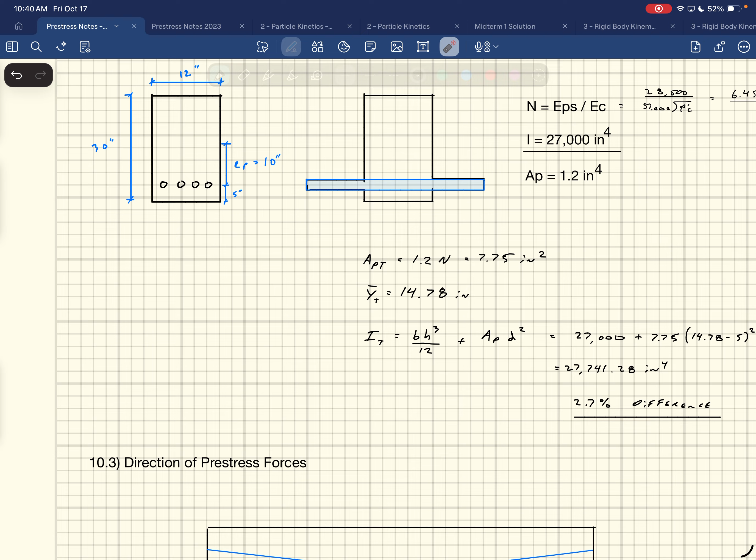So then you have to calculate—now we know that that's changed, we have to calculate what my YT is, okay? And it turns out to be 14.78, but I'll show you where those calcs came from, because you end up doing this a little bit in your homework—you have to find the transformed section properties. I'll kind of show you how you would do that.

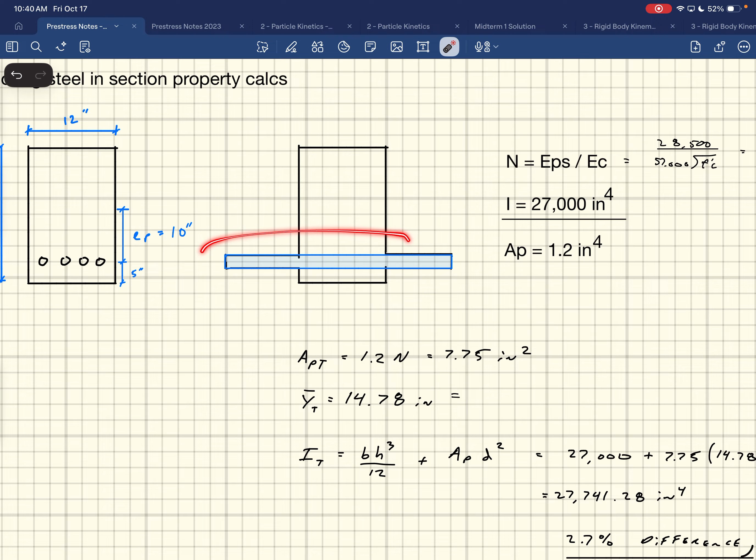So now I find where the new centroid is. It's going to be down a little bit, not at 15, because now I've got this extra little weight down below here. So what you do is a weighted average: it's going to be 12 times 30—so this is the rectangle, and the centroid is going to be at 15, right in the middle.

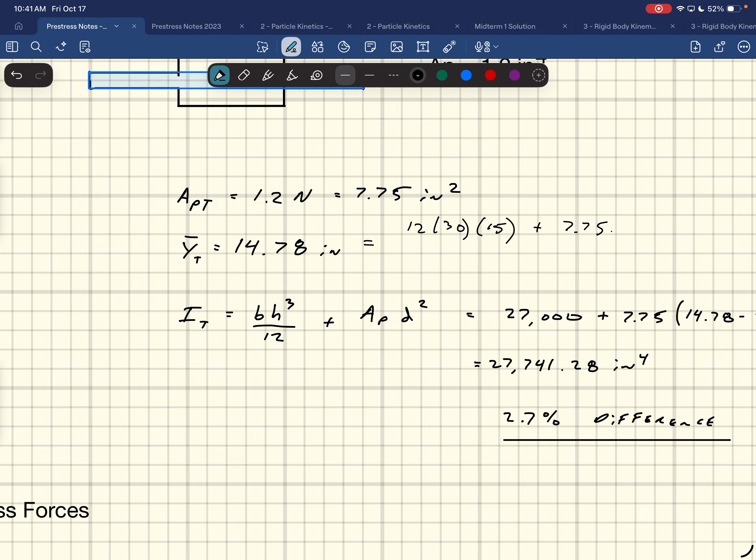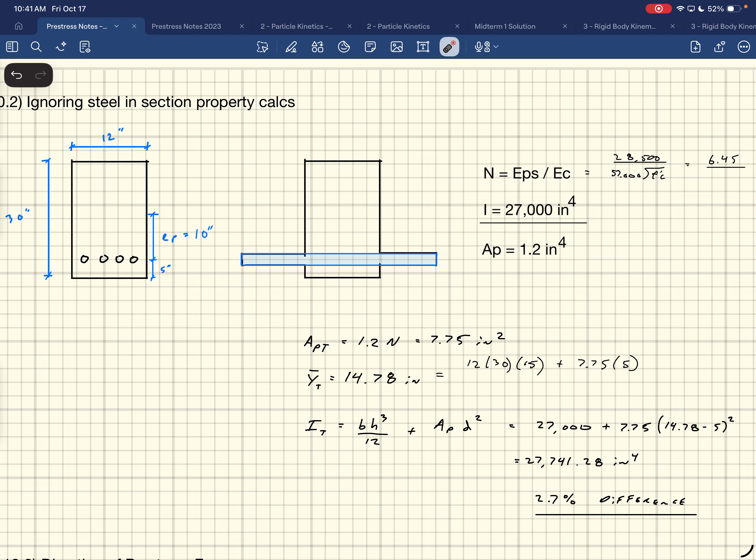Then I add on to it the area of the steel, which is 7.75, and multiply that—it's going to be at 5. I picked the bottom as my reference point, so the centroid of the concrete is just half of 30, going up there, and then right there it's 7.75 times 5. Then I take that and divide it by the total area, which is 12 times 30 plus 7.75.

Right, and that's where that 14.78 came in. So that's where it says that centroid is going to be, at 14.78. So it'll be coming from the bottom here. It just shifted slightly.

And that should show you this. It's not going to affect it too much. It just bumps it down just a little teeny bit, okay?

I don't know what I did here. I don't know what this is. I'm gonna, do you have this filled out on yours? Yeah, it's wrong. Is it wrong? It is slightly wrong. I mean, it's close enough, but I'm just, okay, we're okay. Is that okay?

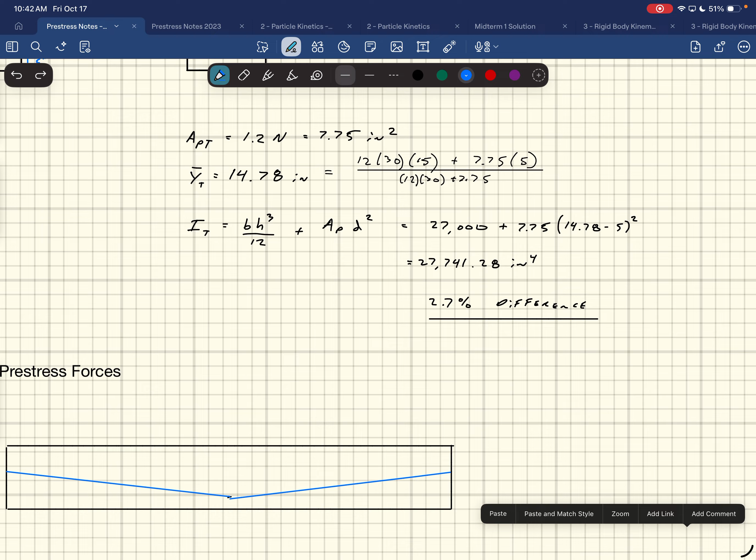No, that's not right. That's not right. That's not right. I never make mistakes, but that's not right.

So now my I transformed is going to be I1 plus A1 D1 squared plus I2 plus A2 D2 squared. Okay, this is the parallel axis theorem that you do there.

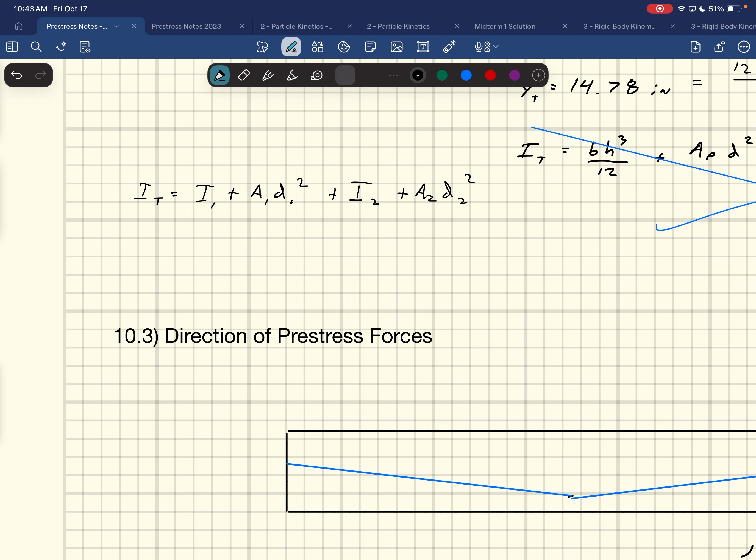Okay, this is of the first one, right, about the new centroid. That's the second one about the centroid. This is the steel about the centroid. Okay, so just fill in those values there.

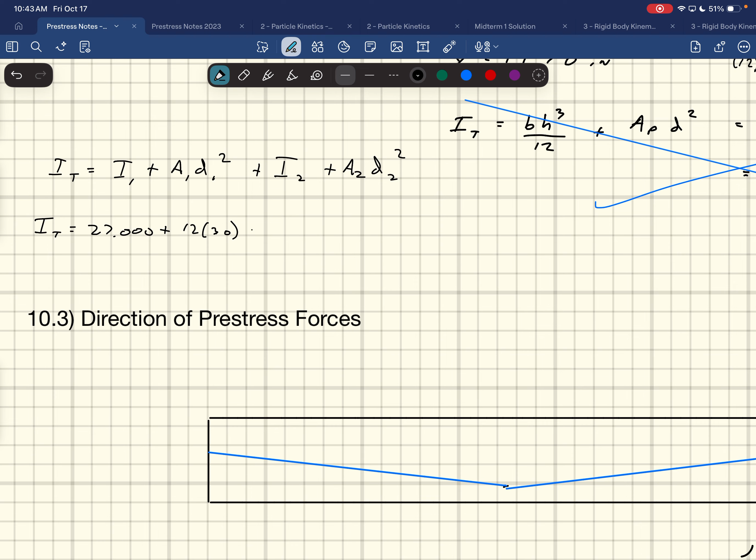IT is going to be equal to 27,000 plus 12 times 30 - that's the area of the first one - times the distance, which is 15 minus 14.78 squared. My answer above on the right left this out, but technically that needs to be in there. But I think the reason I left it out is this is a really small number.

15 minus 14.78, so that's really small. And then you square it, so it ends up being small. But it does change the answer slightly.

And then you add on to it now. This would be - it has no moment of inertia about its own axes. And so I2 is this component right here. This right here is 0. It doesn't really, it's just all concentrated again at there.

So then we're just going to add on to it the 7.75, that's its area, times 14.78 minus 5 squared. And then what we get there is 27,759 inches to the fourth. Right, and that's versus what we would have used, which is 27,000 inches to the fourth.

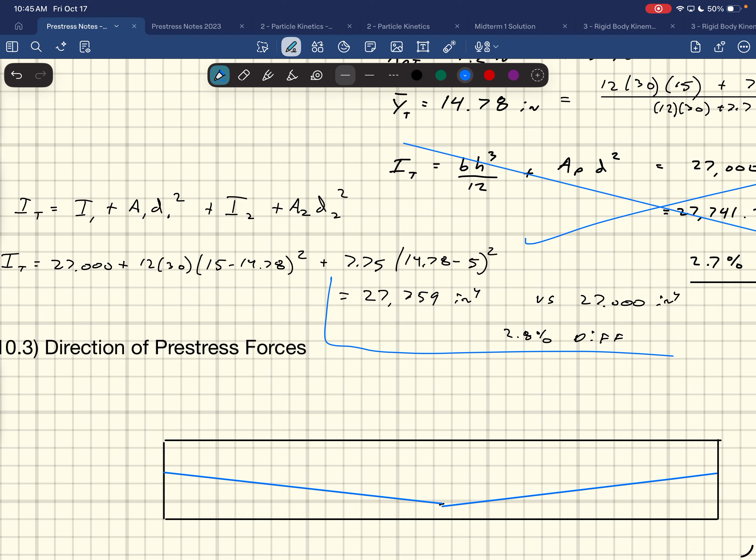And I got a 2.8% difference. Okay, so again, I'm okay with that. There's a lot of that stuff built into a lot of our equations and assumptions as we go along. I would say I'm okay with that too. Don't need to use transformed section properties. This is concrete, for God's sakes, right?

We're just guessing on it, it's all just a guess, right? So like, is it okay? Absolutely, especially since you see this doesn't make that big of a difference. I had an advisor who used to say, it's concrete, you mix it with a shovel. Like, what do you expect, right? It's not an exact science, but it kind of gets us in the realm.

One thing I've always had problems with in Structures 2, when you have predictions of how strong those beams are supposed to be, and they're not - they're different, right? Wouldn't it be cool if you could just predict exactly, and then it breaks exactly that, and this doesn't, right?

And I feel like the steel plates are usually pretty accurate. Yes, but then steel, like that one, I mean, that one.

We used to have to do a professional paper to get your master's here, and that was one of the structures 2 TA's professional papers that came up with that lab. He made it, which is pretty cool. This is the steel plate one that has the 3 holes in it, and you pull it, and that one's really cool.

Because what's off is the ultimate - if you have an assumed FY and assumed FU, that's what's off. Once you test one of them and you figure out what FY and FU are, you nail it. I mean, this is like right, it breaks exactly when it's supposed to. And then you have the holes, right? And if you put the holes next to each other, it rips through 3, but if you just move it a little bit, then it rips through the 2.

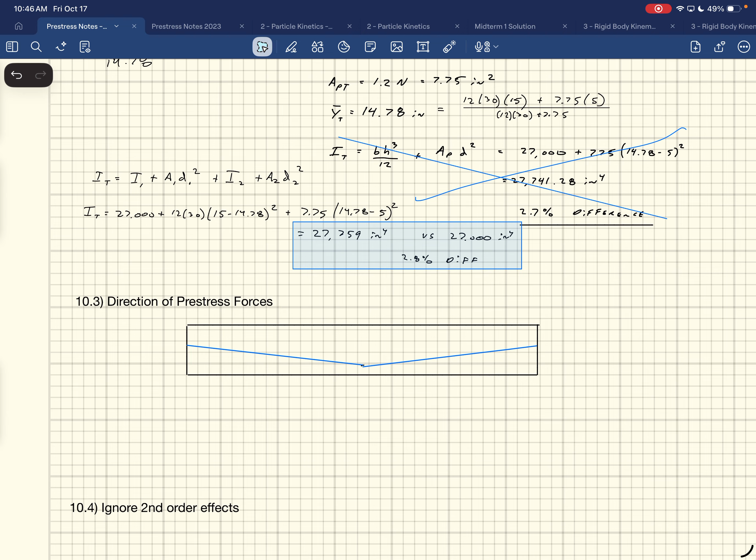But after the whole thing yields, like you predicted it's going to do that, and it does the whole thing. It's so sick. And then there's concrete where it's just like, I think it's just a huge guessing game, right?

Okay, the other thing I've said several times, right, is we do assume that the steel is only going one direction.

We assume that the steel is just being pulled in that direction, and we don't take into consideration that...

Oh, you son of a bitch!

It's actually going like this, right? It has two different components to it. Did anybody use this? We use this part in shear design, if you remember. I don't remember what the variable was, but VP, right? That was the vertical component.

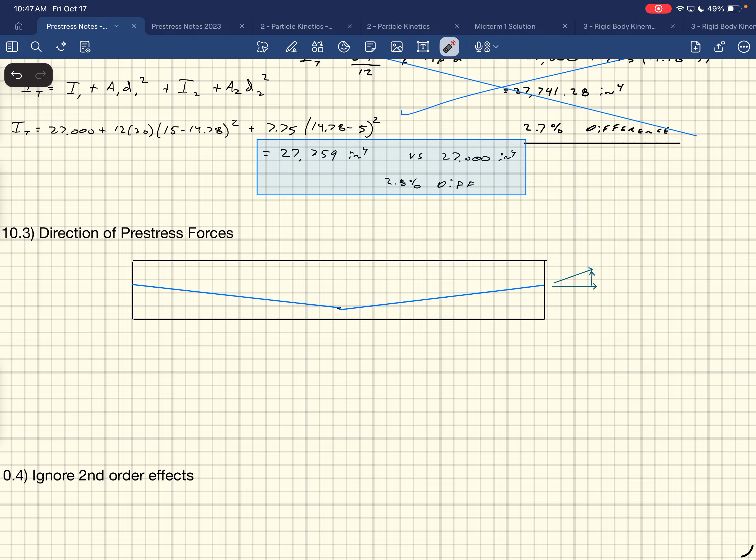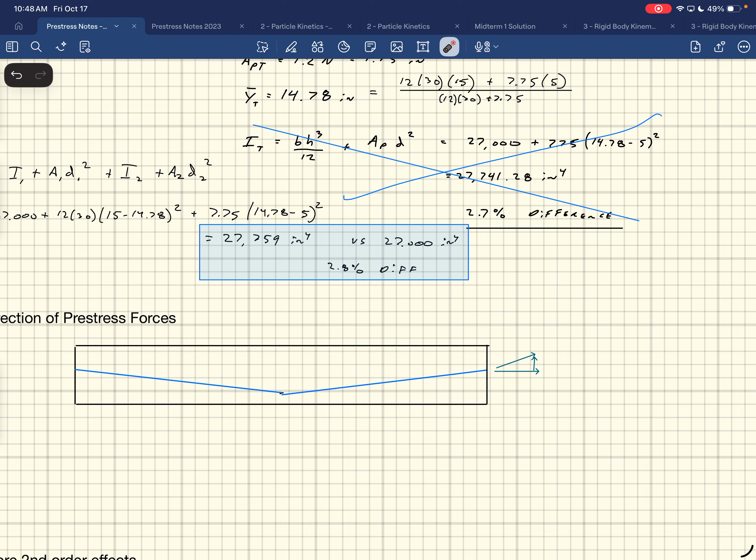Did anybody look to see what its magnitude actually was? It's really small because we never draw these things to scale. Like if it's a 30-foot span, it rises maybe 3 inches over 30 feet or something like that, so it's a very small component. Just keep in mind that we are inconsistent, and we're okay with that inconsistency.

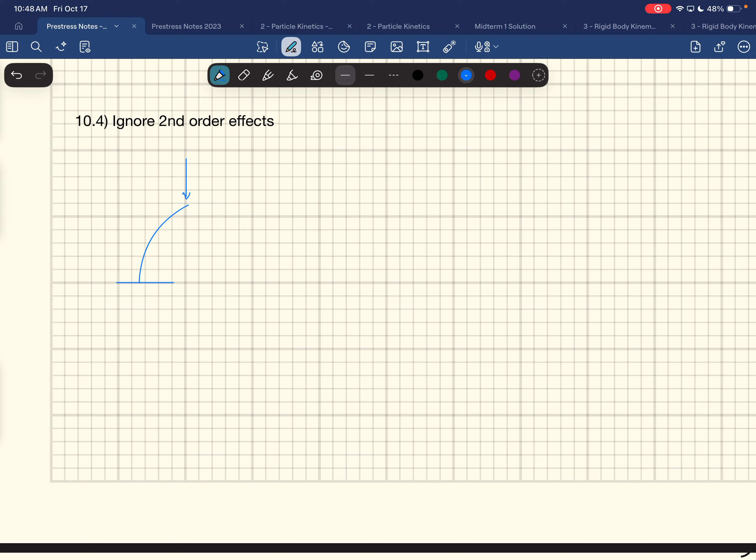The last thing we ignore is second order effects. You know what second order effects are? I mean, it's just this is a second order effect. Like if you bend this thing, this actually causes a moment, right? We ignore it. Because if this thing, I guess you have to put in a lateral load too. Like this thing gets analyzed in its undeformed shape, but really it deflects a little bit, and that little bit of deflection would then cause a moment down at the bottom.

That happens with our pre-stressing as well. Once you analyze it in this shape, but then as soon as it bends a little bit, now there's some second order effects, because now it's out of place, and so there's an additional moment caused due to that deflection.

The only way to capture that would be to analyze it twice. That's why it's called second order effects: you analyze it once in undeformed shape, and then once it's been deformed you analyze it again, and that moment would show up, and then it's going to deflect a little bit more, so you can analyze it again and again and it'll converge on the solution. We ignore that. We're not going to do those calculations to prove to you that we ignore it, but we do in fact ignore it. It really does affect things, but not that much, not worth doing.

That's it for this little video. I like to put these little things in my notes, and then I was like, what is that? And then I go search for it, and in this case it was that big beam working its way up. So that's it on the pre-stressing.